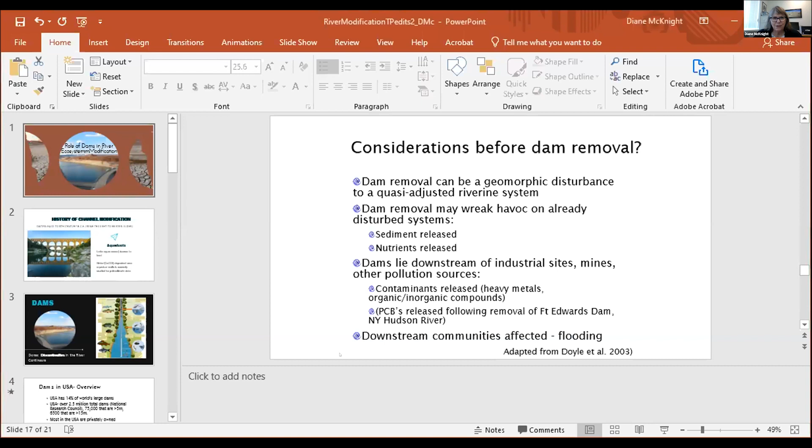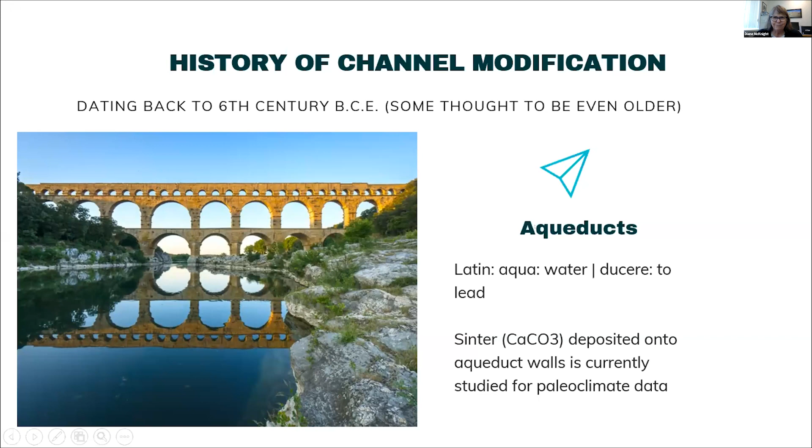I'd like to start off by explaining my role here is to present kind of a context for the innovations that Abe and Gina will be talking about. I'd like to think about the role of dams in river ecosystem modification and point out that the human race has been modifying river ecosystems and the flow of water from one place to another for a very long time. This is a picture of the aqueducts, which are actually thought to go back to the 6th century.

We can apply modern understanding of how river ecosystems work. There was an important paper called the River Continuum Concept, published in 1980, that thought about how river ecosystems change downstream. For example, if we think about the Mississippi River at New Orleans, it's a very muddy river - there are songs about that - and that changes the light attenuation and whether the river is photosynthetic. Whereas upstream, the shading of the rivers by trees in forested catchments also limits photosynthesis.

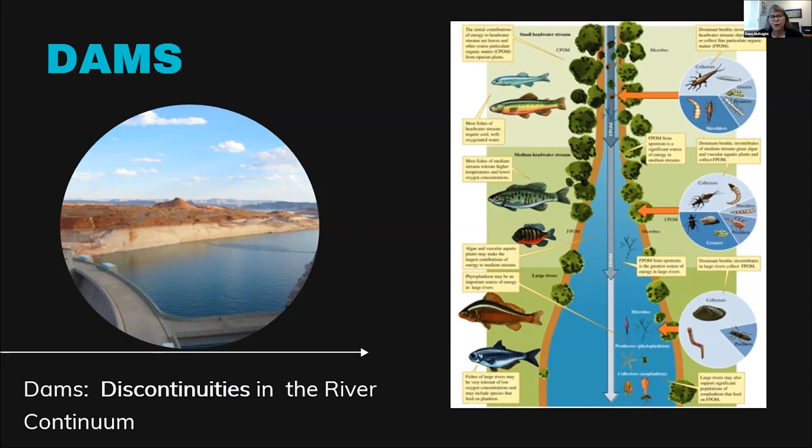Within this framework, dams represent a discontinuity in this river continuum, because the sediment settles out, there are impoundments with a lot of open water and potential for photosynthesis both in the reservoir and also in the clear water downstream.

The US has 14% of the world's largest dams, and there are over 2.5 million dams, many that are greater than 5 meters and also greater than 15 meters in terms of height. Most dams in the US are privately owned.

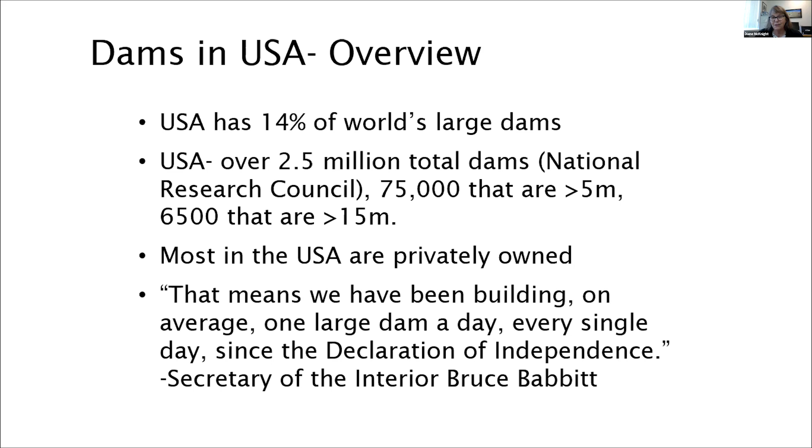If we think of this collectively, this is an old quote from Bruce Babbitt: we have been building on average one large dam a day, every single day, since the Declaration of Independence. So that gives you a sense of the scale at which dams have been built in the United States.

Hydropower is certainly a very important goal for dam building. About 31% of US power comes from hydroelectric. This is a picture related to the Colorado River.

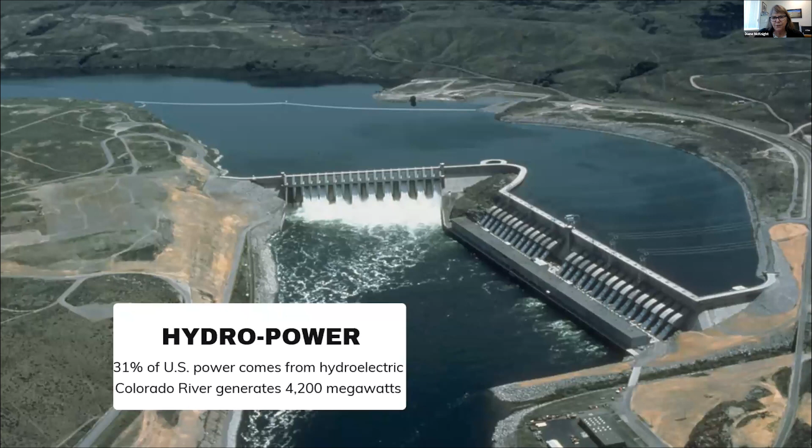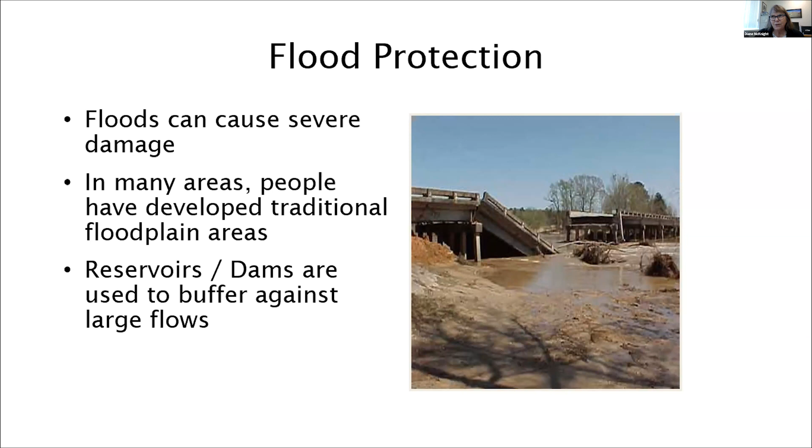Another important goal in terms of dams is for flood protection. Obviously floods can cause severe damage - we've been hearing a lot about this around the country over the last several years - and the dams can be used to buffer against large flows. One of the exacerbating issues, however, is people have developed cities, homes, and such in traditional floodplain areas, so that if there is a failure of the dam, there's high risk.

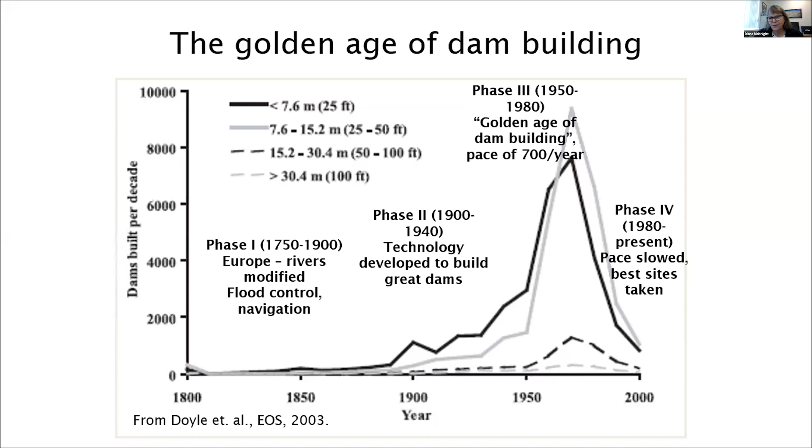We can look at the history of dam building. This is from an old paper and shows that between 1950 and 1980, we can think of this as a golden age of dam building, a pace of 700 per year, and these lines show the heights of the dams. Now we're in a phase where there haven't been as many being built.

There are ways in which the dams clearly change biological processes in rivers. We have the inundation of habitat, reducing river levels, and altering the timing of flows by holding water back.

In some cases, rivers have gone from being not perennial, intermittent rivers to being perennial. There's also an increase in water temperature as the surface water of the reservoirs warms up. And these dams clearly retain gravel, woody debris, and nutrients.

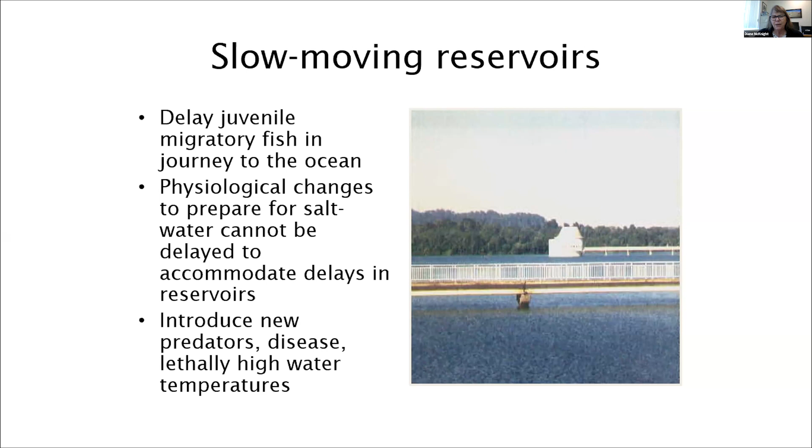In the context of fish, which is one of the themes here in terms of enhancing fish and aquatic organism survival, passage through a reservoir can delay the juvenile migratory fish's journey to the ocean and cause physiological issues as well. There can also be new predators and issues related to high water temperature and disease.

Another context for this discussion is that there have been many recent examples of recovery of aquatic ecosystems and fish in particular after removal of dams. These are just a few examples shown here. The Elwha River is one of the most commonly cited examples, where two large hydroelectric dams were removed. I've included a link to a video about this.

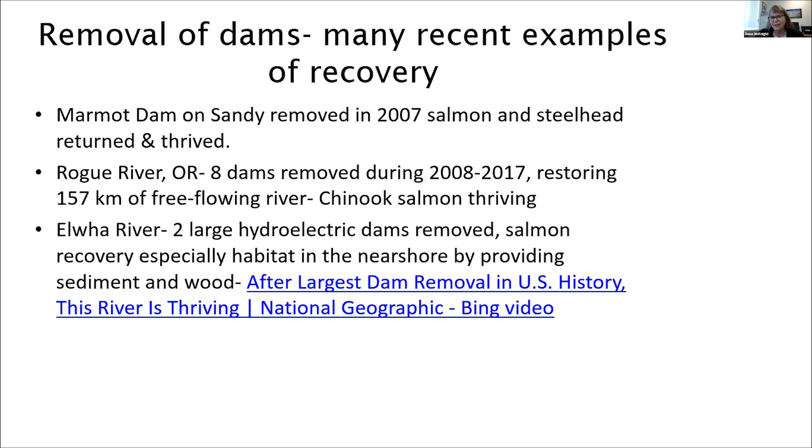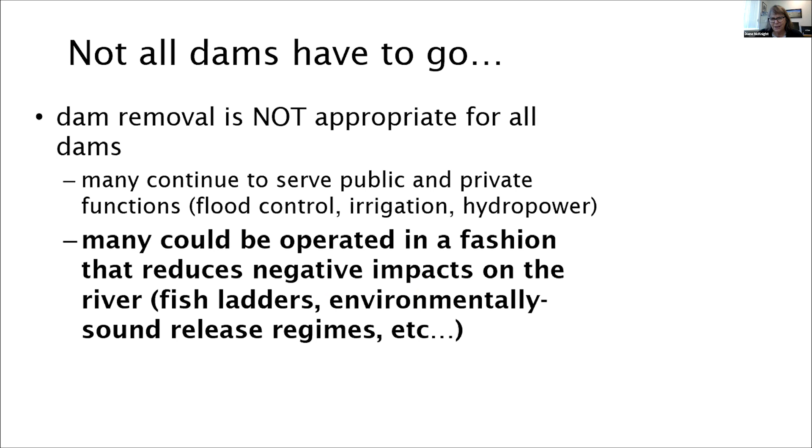But clearly, not all dams have to go, and I don't want to leave you with that impression. Many continue to serve public and private functions—flood control, irrigation, hydropower—but many could be operated in a fashion that reduces some of these negative impacts. This idea of, well, let's be smart about it. We can think about which dams are ones that need to be enhanced in some ways.

Thousands of dams were built in the 1930s, 40s, 50s and 60s, and they're nearing the end of their design life. Some of the issues have to do with sedimentation. As I mentioned, the woody debris and sediment doesn't make it downstream—it accumulates in the reservoirs, and the reservoirs lose capacity compared to their initial conditions when the dam was built.

And then the other issue is clearly degrading concrete and degrading infrastructure more broadly. I like to point out that most civil engineers know that concrete doesn't fix itself.

Another issue to highlight is that dams were designed based on a concept of stationarity of hydrologic variability—this idea that this is the 100-year flood, this is the 500-year flood, where we can use records of the past to know the likelihood of a certain flood occurring. But since 2000, there's been recognition, and a great deal of publications have asserted, that this concept of stationarity is dead. It's not useful anymore.

I have a link here to a Bureau of Reclamation video called Challenge at Glen Canyon, about a 1983 event where there was a high snowpack and then rain on snow, and they almost lost the Glen Canyon Dam, which is unimaginable to think about. So now the recognition is that stationarity is a zombie, because this idea was used not only in building the infrastructure, but also in regulatory constraints with water rights and such.

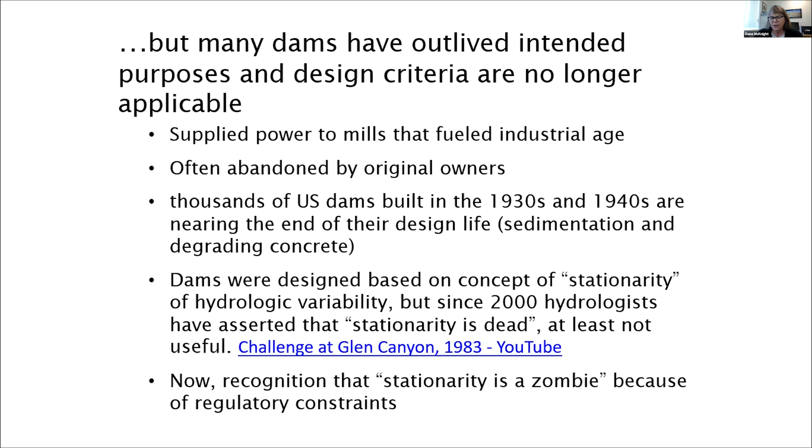Other issues you may be aware of: falling reservoir levels threaten important uses such as water supply and recreation. Many of these dams have not been well maintained and pose risks to downstream communities under what we can think of as deep climate uncertainty. For example, the atmospheric river phenomena that was so important in the context of the recent weather in California. This results in some hydropower plants not being able to be operated at full capacity.

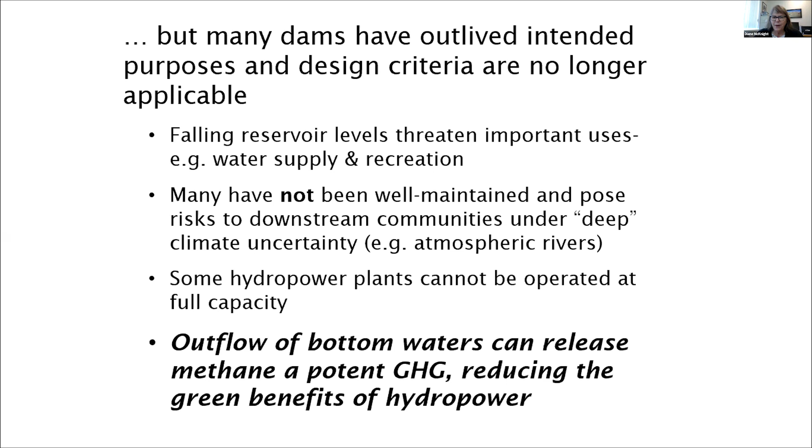Another issue in the context of climate change is that the outflow of bottom waters released from the reservoir can release methane, which is a potent greenhouse gas, because methane accumulates in the bottom waters of these reservoirs, and this can counteract some of the green benefits of hydropower.

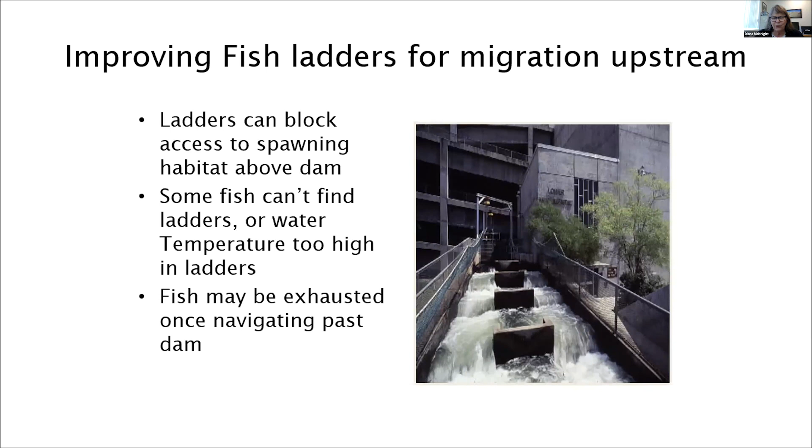Clearly, there have been approaches for enhancing the survival of fish in the context of fish migrating upstream. Fish ladders have been improving, and some dams coming up for relicensure will be adding fish ladders, but there are challenges to consider. In general, there's a range of considerations, so this has to be approached reservoir and dam one at a time. There's no general approach for what to do—the context, the uses, and the extent of degradation all make an important component.

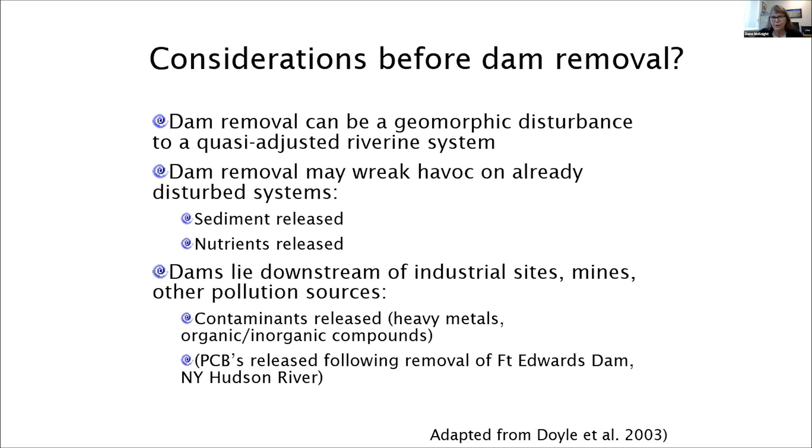Innovations on the engineering side in terms of turbines are very important. The Bureau of Reclamation has been upgrading their turbines over the years at Glen Canyon, for example, obtaining more power for the same amount of water since the dam was first built. So I'm going to stop sharing my screen, and hopefully that was a brief intro to what will be talked about next.

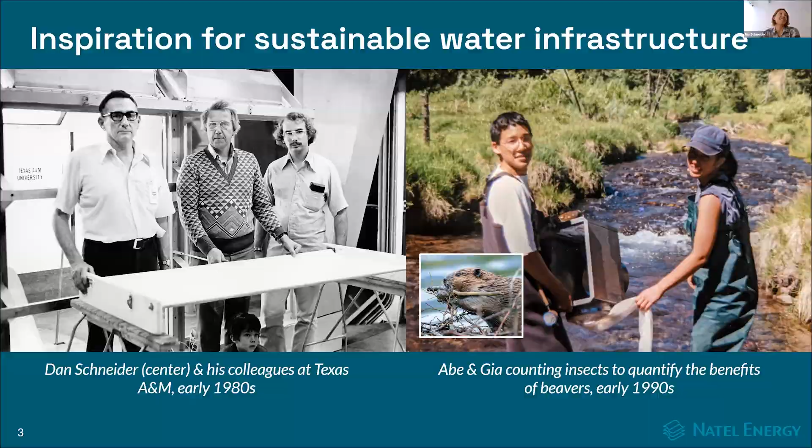Well, for some grounding context for hydro from an energy supply perspective, hydropower today is the third largest source of electricity behind coal and natural gas globally. It is a major part of our electricity supply. We have about 1.3 terawatts installed globally, and it's about 50% of the renewable or zero carbon energy supplied today.

It also is a really interesting source of flexible power. A number of studies have really highlighted the fact that a gigawatt or one unit of hydro is able to firm somewhere from 3 to 5 - some studies show higher than that - but we like to use this idea that one unit of hydro helps firm 3 to 5 units of wind and solar.

As we drive to a zero carbon grid, particularly given the fact that we have a lot of existing hydro on the grid today, figuring out how we modernize and upgrade and get more out of that existing hydro - given that it's already interconnected, we don't have to build it new, we don't have to go through a 5-year interconnection process in some cases - figuring out how we can do those upgrades is really critical to accelerating the energy transition.

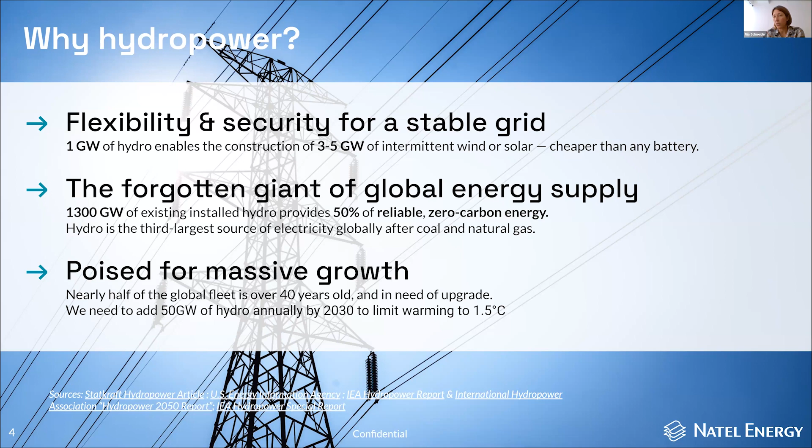In addition, we want to unlock new growth. So how do we get new hydro on the grid? And to do that, we clearly have to move the needle from an environmental perspective.

Another couple data points that I think are important to understand some of the nuance at play: even in drought, out here in the West, we are seeing hydro play a really critical role from a grid reliability perspective. This issue has many layers that you have to dig through to understand the right trade-offs and choices to make as we modernize the existing fleet. So what you see out here in the West is basically, even in drought, hydro is dispatching right alongside natural gas day in, day out to balance the grid. That's directly a result of the fact that hydropower is a premier reliability and flexibility resource alongside natural gas, from a pure power generation, power systems perspective.

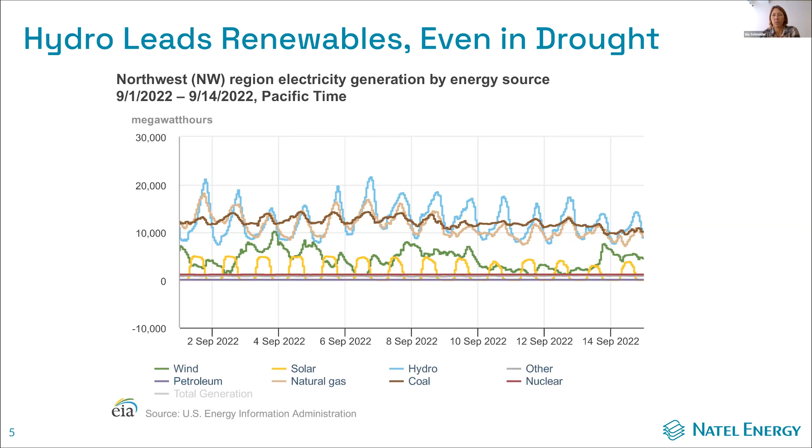Another interesting data point: in 2020, another very severe drought year here in California, we had two weeks where the grid here almost blacked out, and hydro was two-thirds of the reliability resource that kept the grid in California on during that critical period. It was just because hydro can time shift. It was able to dispatch down in the middle of the day, then dispatch during the witching period, the evening hours out here, which are particularly tough to deal with because solar tapers off and we still have peak load.

So just some context as we think about the challenge we set out to solve: it's this combination of how do we take the old fleet and modernize it while meeting modern environmental requirements, particularly around fish passage. And then, where we are thinking about building new, which is in general mostly not here in the US, how do we show a pathway to do that new build in a way that takes all these lessons learned and does it in a much more sustainable, climate resilient way for the future.

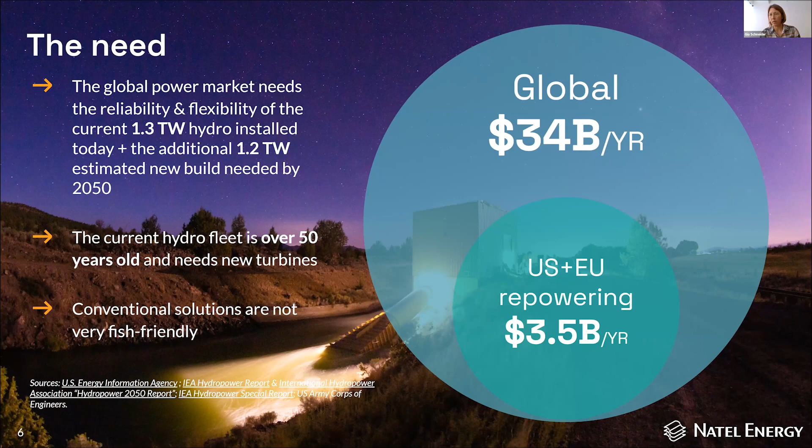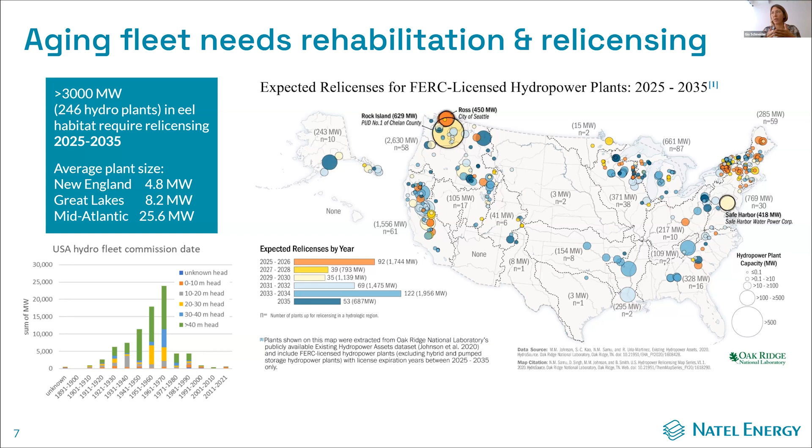Some numbers around the aging fleet: the aging fleet problem is exacerbated by the fact that we have a lot of old plants that are at the end of their license life. We have a lot of assets coming up through relicensing in the next decade that are also 60, 65 years old with old equipment that needs to be upgraded. That's the very specific impetus, or market demand factor, that is driving the uptake of the work we are doing.

To bring that home to a very specific case around the regulatory driver for fish, focusing on eel: there's over 30 gigawatts of the US hydropower fleet that directly overlaps with critical American eel presence. Unfortunately, conventional hydropower is very eel unfriendly, to be blunt. As a result, we've seen a pretty abrupt, unfortunate tapering off, really a crash, in the eel population over the last couple decades.

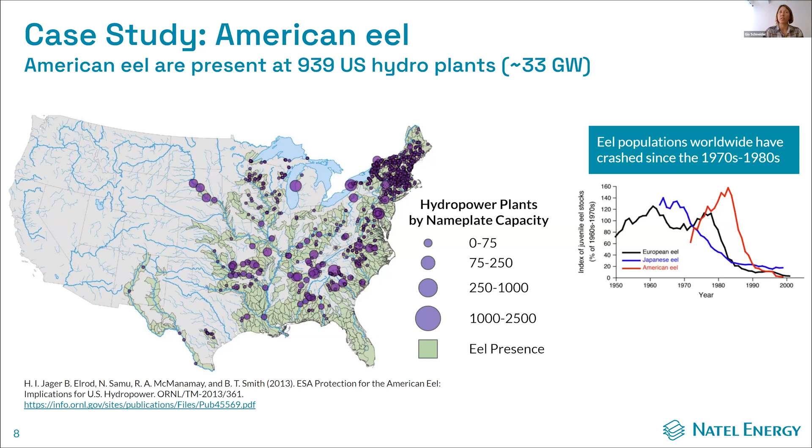So you might ask, why do we care about eel? The reason we care is because eels are a very critical part of the life cycle for freshwater mussels. Why do we care about freshwater mussels? Well, freshwater mussels improve water quality, and we've seen, over the last couple of decades, some really major water quality issues in our rivers. Those are obviously not good for the broader environment, but they also have some very specific impacts on humans.

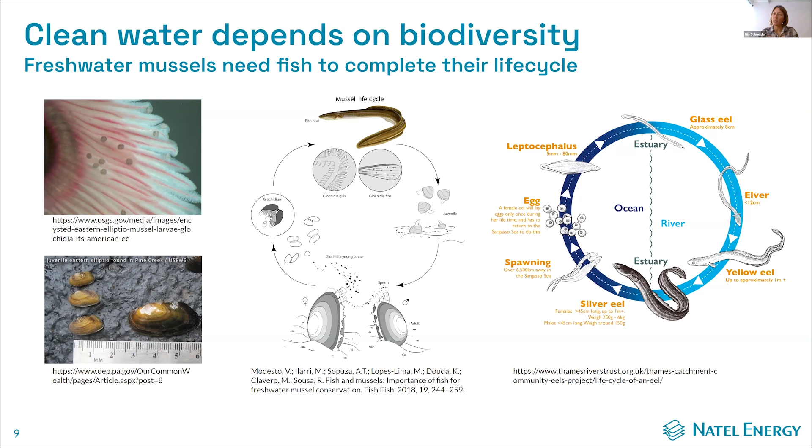At the end of the day, I think we like this example because it helps illustrate how we can engineer solutions. If we have the right drivers, we can apply our engineering skills to develop technical solutions that can help unlock a cascade of natural infrastructure or natural improvements as well. We just have to understand the relationships, how these things all go together. But as I said, eel unfortunately don't interact very well with conventional hydropower turbines—it's just the result of the way conventional turbines are designed.

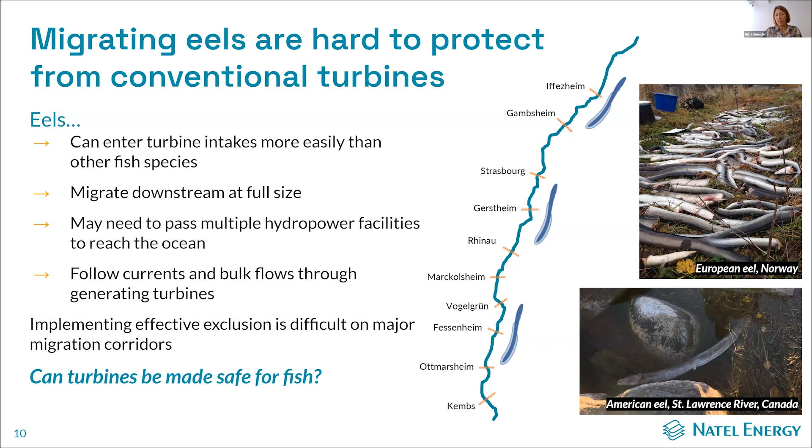So we set out to answer: can we make this better? And I'm going to turn it over to Abe to talk us through. Thanks. Yeah, so one of the biggest reasons eels aren't very compatible with hydropower turbines has to do with their shape. Eels are long and skinny, kind of like a snake in their form.

They can fit through places that a lot of other fish wouldn't necessarily be able to make. But also they migrate downstream as adults. So I think a lot of the public, if asked to tell me a fish that might come into contact with hydropower, the first response might be salmon, which is true—there's a lot of issues around salmonids and hydropower. But certainly on the East Coast, eel are the ones driving hydropower regulations and operational curtailments.

First and foremost are mechanical stressors—direct strike with fast moving and thin blades, but also fish can get stuck between parts that are moving and parts that are stationary. And in particular, some kinds of hydropower turbines have geometries that really exacerbate this risk quite a lot.

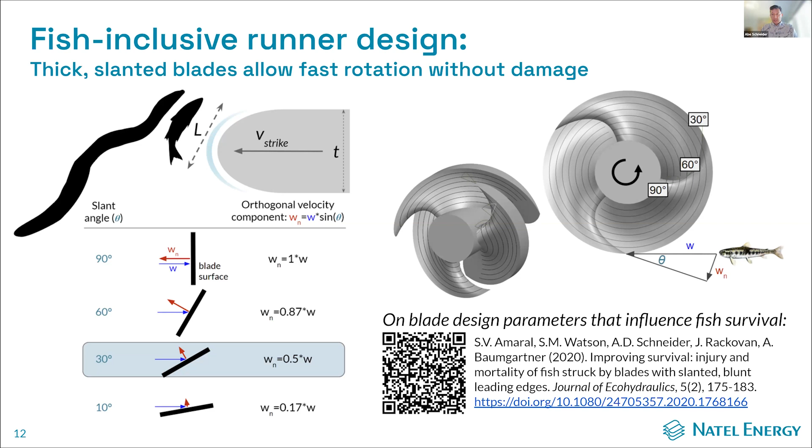The link on this page summarizes a series of nearly 2,000 live fish strikes that were done to test this hypothesis. These strikes have given us a quantitative basis, a dose-response curve that allows us to computationally design new and arbitrary turbine shapes with fish physiology as a driving design constraint.

So, what do turbines look like that use this type of input? Here's an example. This is a 2-meter diameter turbine at its full rated head of 10 meters. This turbine would produce about 1.5 megawatts.

One of these units is installed in Oregon, and there should be a handful of these going into a new project in Africa sometime in the near future. But this is just one example of what a turbine could look like. In the world of hydropower, there's quite a variety of intake and outlet configurations, but they all basically have a component that spins and extracts work from water, and that's what we're designing to be safe for fish.

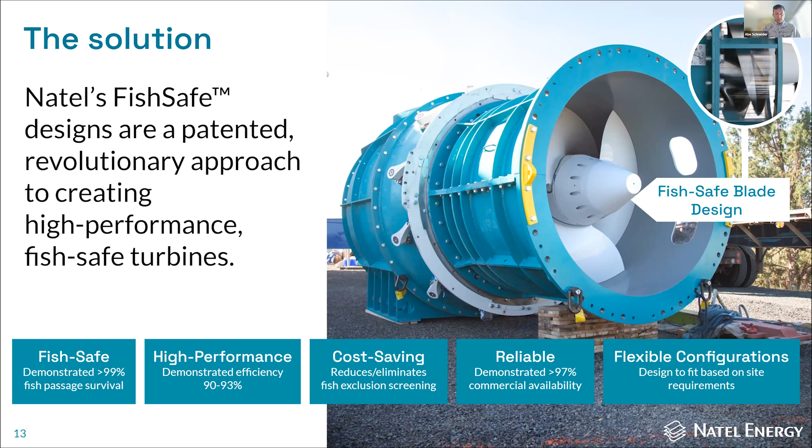So there are 3 units currently operating with runners following this design principle. I should mention that we began work on this idea in 2019, so everything you're seeing has basically been accomplished since then.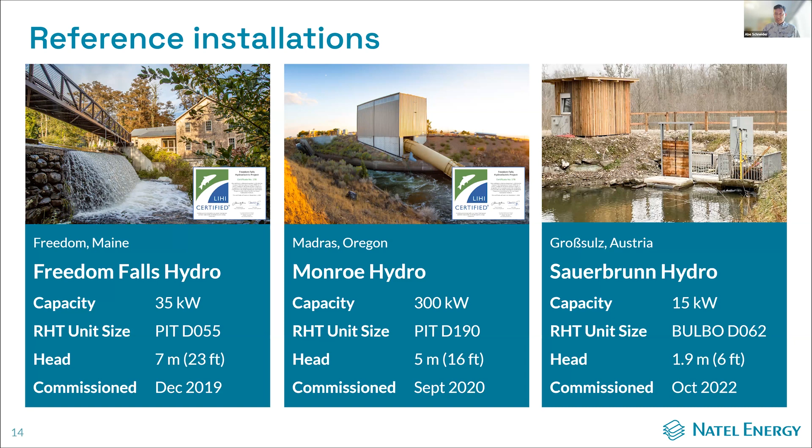There's one unit in Maine, a small unit at an old mill which has been rehabilitated with a fish-safe turbine. And then there's one in Oregon, shown here in the middle. Excitingly, our first unit in Europe was commissioned in October last year in Austria. There's another unit that should come online in Virginia, potentially later this year. And I'll talk about some of the very exciting, much larger machines that are up and coming.

Natel has invested very heavily in testing of its turbines, and specifically and uniquely in testing the success of passing fish through the turbines. We're based in Alameda, California, which is right across the bay from San Francisco.

This is all fairly conventional. What's really unique about this for the hydropower industry is that we can introduce fish into the pipeline, allow them to pass naturally through the penstock, through the turbine, directly observed with high-speed video cameras, and then be extracted and inspected for their condition within seconds of passing through the turbine.

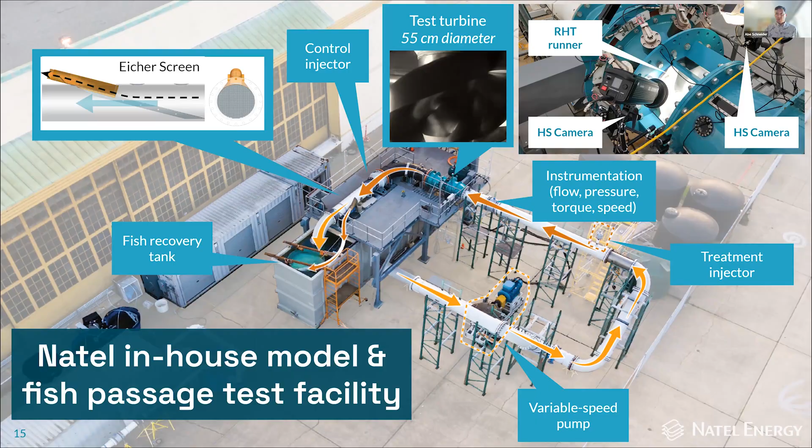This is something we have now been doing for roughly 2 years continuously with over 6 different species of fish, including eel, trout, warm water species like bluegill and bass, sturgeon, catfish, and the list is increasing. We've also cultivated really strong collaborative relationships with national laboratories, local universities, and fish farms in carrying out all of this work.

So the next couple of slides, I'll show you some specific examples of fish passage tests we've conducted. First, here's a video of eels passing through our unit shown on the prior slide. This is a passage test we conducted with the Pacific Northwest National Laboratory. The entire test is summarized in detail in the paper linked on this slide. Top line, really exciting results: we were able to pass eels with 100% survival, 0 mortalities, under extreme conditions never before seen.

So these are eels that were up to 65 centimeters long, being passed through a turbine that's only 55 centimeters in diameter at 10 meters of head and 670 RPM. If you think about how fast that is, this is an extremely fast rotating turbine with really large animals passing through with no mortality.

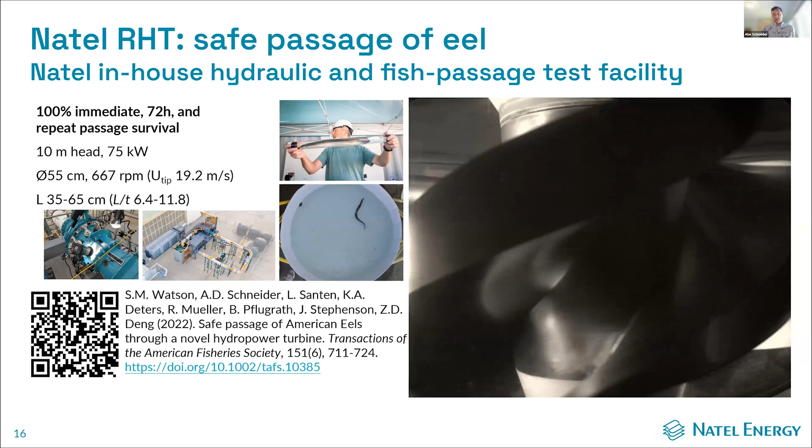Really importantly, because we're directly observing passage, there's very little uncertainty as to what's actually happening inside the machine. This is something that hasn't been done before. We captured about 90% of the individual specimens in the test, and we were able to learn quite a bit about the kinematics of the fish passing through.

The next slide shows a similar test, in this case done on a plant on a wild stream in Maine. These are juvenile alewives. Alewives are in the shad family, or the Alosinae family, and they're one of the two species really driving hydropower regulations regarding fish passage on the East Coast.

Folks who attended MIT probably were on the T and heard the word Alewife, the Alewife station. Well, that's in reference to these fish, which have a really important historical, cultural context in the region. These fish are extremely delicate, sort of famous for dying if you look at them funny.

But we were able to design a test which allowed for 100% recapture of these fish without any need for tagging, which helped to reduce handling trauma. And we observed between 98 and 100% control-corrected immediate and 48-hour survival.

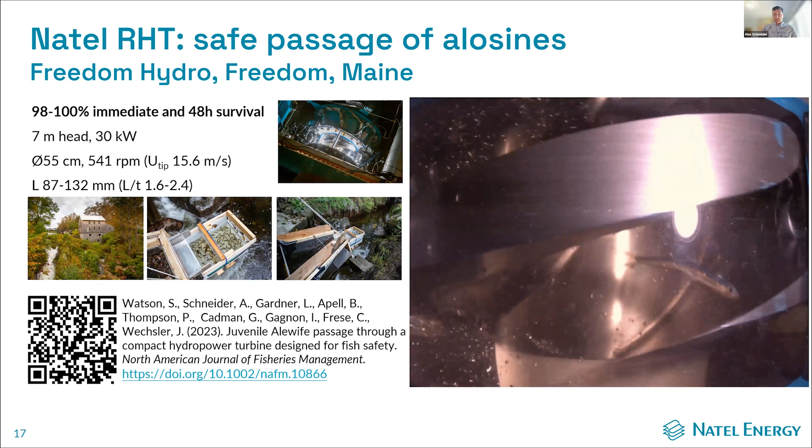We were also able to capture this amazing high-speed video of the fish basically just sort of raining through the turbine and not really being struck in a violent way by the blades, which is what we would expect for fish of this length-to-thickness ratio.

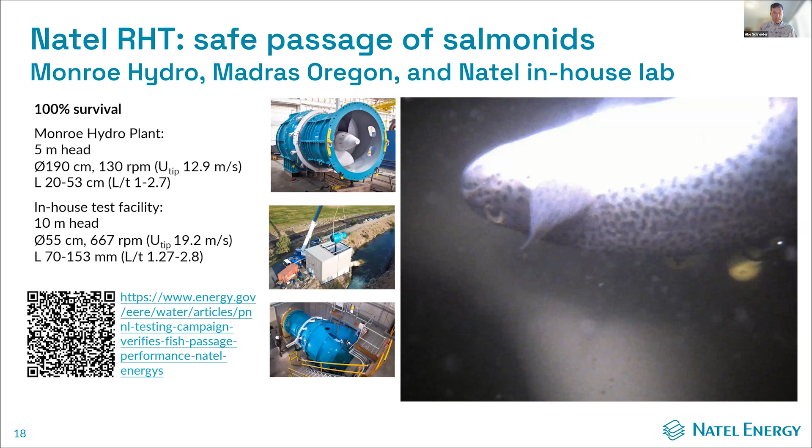The next slide is the last one I have to show an example of fish survival testing, in this case done with rainbow trout. We've done two different sets of tests in collaboration with the Pacific Northwest National Laboratory on our small plant in Oregon, which is the 1.9 meter diameter turbine.

We've tested trout up to just over 50 centimeters in length, which for any fly fisherman would be a lifetime trophy rainbow trout. And in our in-house test facility, we've tested trout as small as just over a couple of inches, up to 6 inches, through a 55 centimeter turbine with 100% survival in all instances.

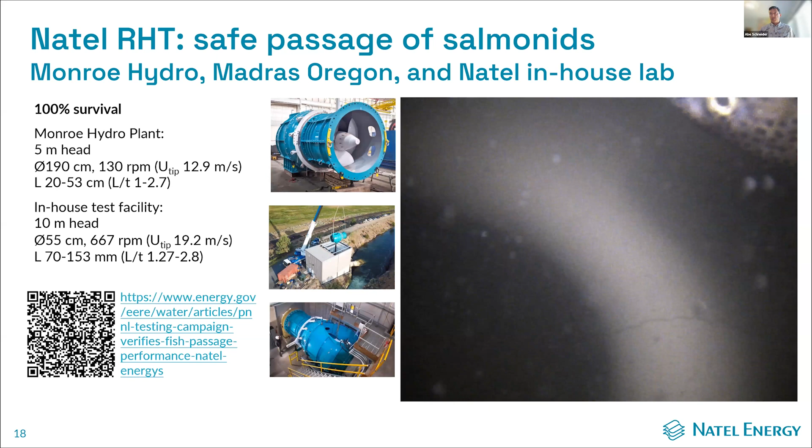I think one of the overarching points of all of this is that we're approaching fish survival from the perspective that it's not just one species and it's not just one life stage. We're trying to design turbines that can allow all aquatic organisms that could get entrained into a turbine to pass safely.

This really represents a generational opportunity, in that we have this simultaneous need to relicense but also to rehabilitate our aging hydropower fleet. It's a fantastic opportunity to make wise decisions and replace these old turbines with turbines that are safe for fish for the next 40 to 50 years. Now is the time to make those good decisions.

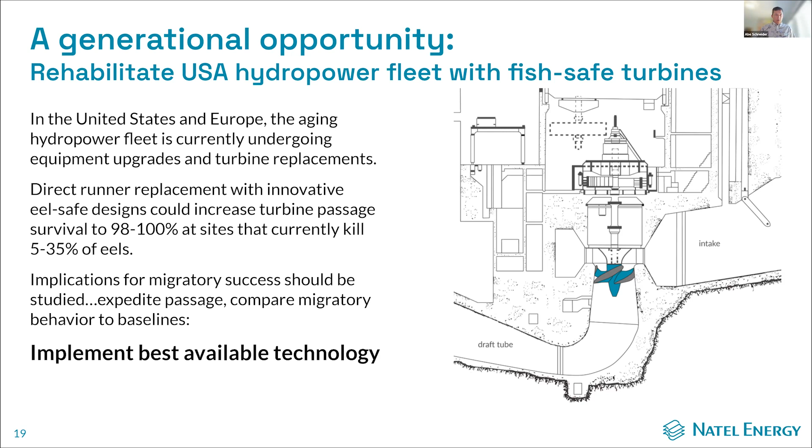And that's the concluding point I wanted to make, which is that what we are working on and creating is a design method for fish-safe turbines that applies at a huge range of scales, from small to large, and can really allow for actionable options to significantly improve the sustainability of our hydropower resource. Thank you.